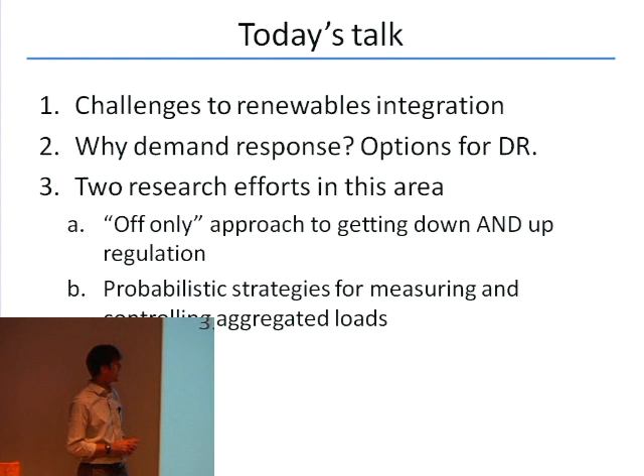So just to give you a bit of an overview of what I'll be talking about. I'm actually going to spend a fair bit of time just framing the issues and talking about some of the decisions that we need to make if we're going to proceed with demand response for supporting renewables integration. So those will be the first 2 sections of the talk. I'll talk about some of the challenges to renewables integration and why we might want to pursue demand response to address those. And then I'm definitely going to talk about this first research effort that is supported by CIEE and i4energy, what I'm calling an off-only approach to getting down and up regulation.

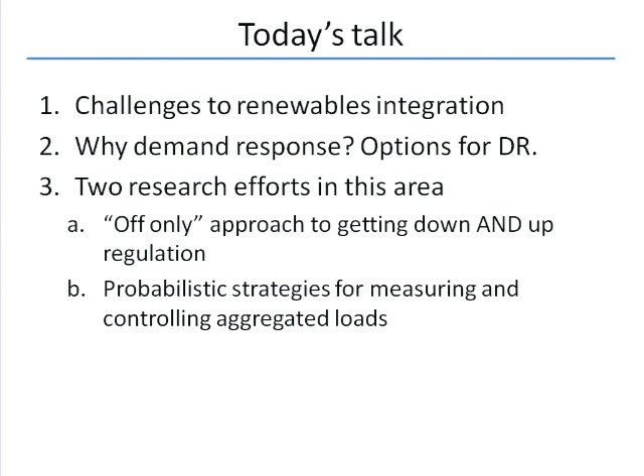So the idea is that we're going to try to switch loads off and use the natural dynamics of the system to try to get loads to actually increase their consumption at certain times as a result of letting them return to the grid. If there's time, I'm going to talk about this second project, probabilistic strategies for measuring and controlling aggregated loads.

Okay, so first let's just go through some of these issues about challenges to renewables integration. I've got 2 or 3 slides that I've pulled from other industry studies and reports that I think really capture what the dominant issues are.

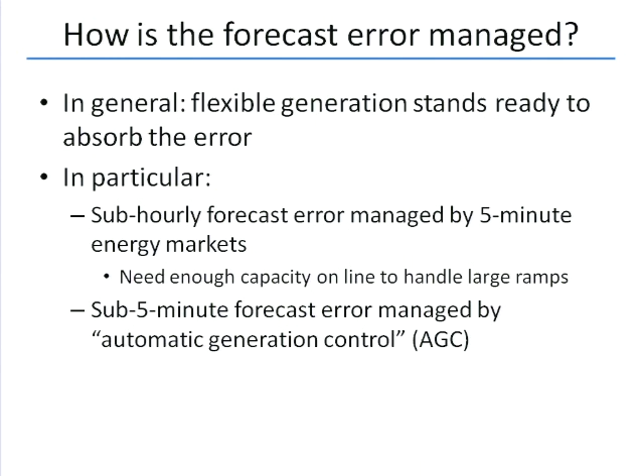The service is often called regulation, but this is basically like, you're no longer operating an energy market. You're just giving a system operator a dial where the system operator can just turn generation up and down as they need to. And so in this case, they procure a certain amount of capacity that is just sort of standing ready and available to do what they need.

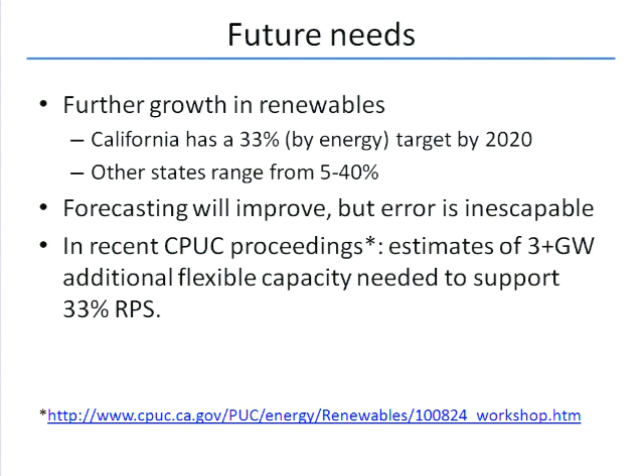So thinking toward the future, California is really, I think, kind of a hotbed of massive projected growth in renewables. So we've got a 33% renewable portfolio standard target by 2020. And that would be 33% by energy, not by capacity. And there's a big difference when you think about the fact that wind and solar produce energy only for a fraction of the time that they're actually connected to the grid.

Other states range from 5 to 40%. 40% is the state of Maine, and they're going to be operating in the ISO New England. So it's really the ISO New England's problem, and their total share wouldn't be 40%.

So forecasting is certainly going to improve, but the error is inescapable. And if we think about what's happened, Pacific Gas and Electric and the California ISO have been trying to address what they think they're going to need for balancing resources on the grid in 2020 if we meet this target of 33%. And they're saying that, in addition to everything we're going to build to meet load growth and everything that we're going to build to try to meet these renewable portfolio standards, we need 3 or more gigawatts of additional capacity on the grid just available to balance these forecast errors.

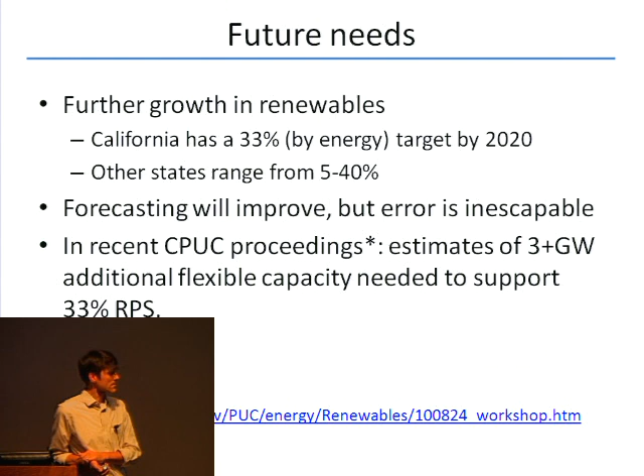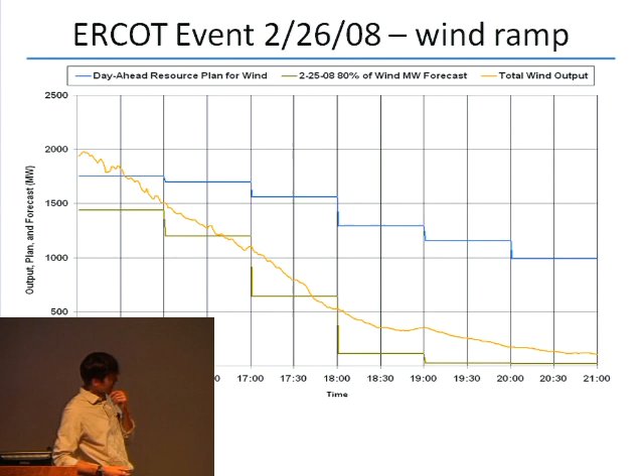So that's a really significant investment. And at this point, our best option is to look toward sort of fast ramping combustion turbines to do that job. So that sort of leads us to the question why and also how can demand response contribute to this challenge. So again, I'm going to start with an example of what happens in practice.

So this is an event that some of you may have heard about. It was publicized pretty widely. In ERCOT, about 2.5 years ago, they had a forecasted wind to go according to this blue line over the span of about 6 hours. And what they actually got out was this yellow line here. So you can see that by the end of this period, they were looking at a deficit of about 1 gigawatt from what they had expected versus what they actually got out.

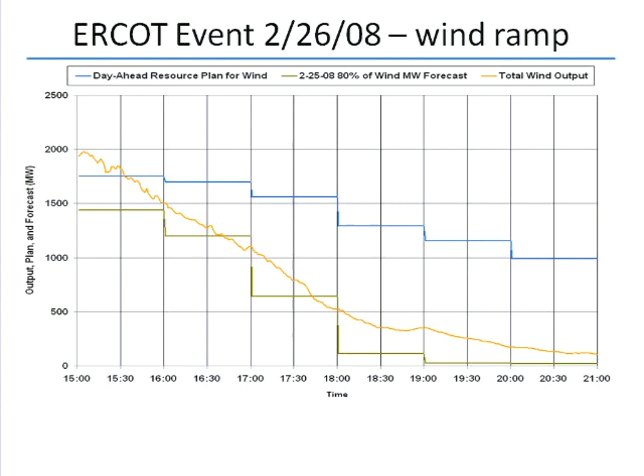So what happened? They saw frequency decline to 59.85 hertz, which is a really significant deviation in large-scale power systems. So in addition to bringing other generation online, what ERCOT did was they called 1.2 gigawatts of load that they had available to curtail. They had established contracts with this load ahead of time. The way that they called them was literally calling them on the telephone. They used the phrase verbal dispatch instruction, or VDI, which makes it sound really fancy and special, but they're literally picking up the phone.

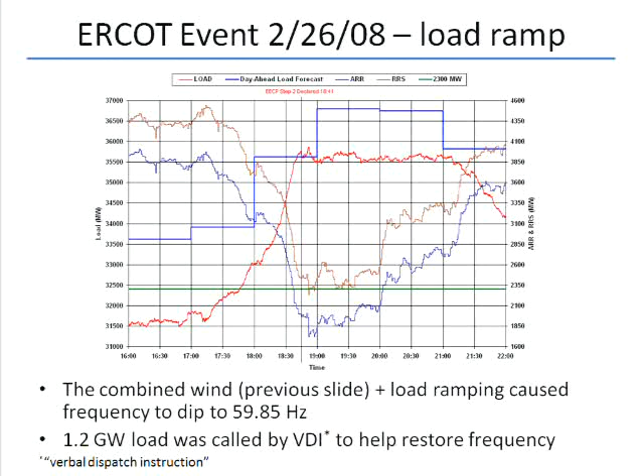But still, even though they were using this pretty crude technology, frequency was brought back in line in a matter of minutes. So this demand response event, even though we were using pretty crude approaches, had a really significant contribution to the performance of the system. Okay, so let's then think broadly. I'm going to spend the next few slides trying to frame in broad terms what I think the benefits are to demand response and some of the challenges that we face to implementing it specifically for the purpose of renewables integration.

So I think that arguably one of the biggest benefits is that there's a potential for a very fast response, essentially emissions free, because we're not moving generation around, we're not having to build additional generation. We're taking things that are already connected to the grid and serving some other purpose: refrigeration, water heating, space conditioning. We have these loads on the grid for some other reason than to provide a service to the system. But if we can bring them together to provide a service to the power system in addition to the service that they provide locally, then we've basically got two value streams. And ostensibly, you don't have to pay as much for either one. They can sort of cover each other.

So the second big potential benefit to demand response is that you may not have to pay as much to get the service as you would if you were just building new generation, because we've already got loads on the grid and we just have to figure out how to coordinate them. Okay, but then you might think, well, you're going to start moving loads around and, as a result, ask people to be uncomfortable or for their hot water to be cooler than they want it to be. But the beautiful thing is that in the US, about 50% of our electricity demand comprises loads that are thermal, and their ultimate service is to provide cool or heat. And the beauty of these loads is that we basically charge them.

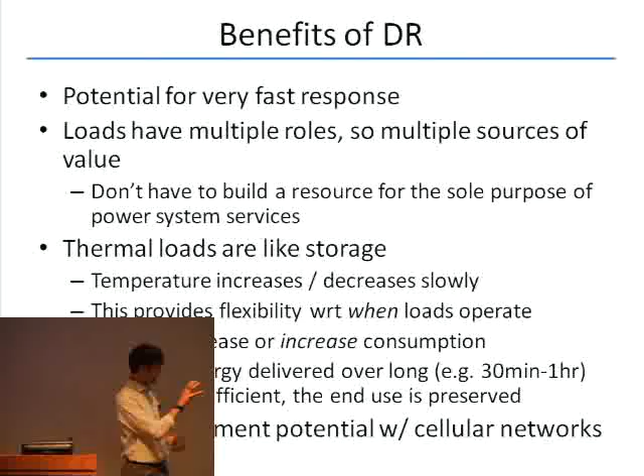So let's see, what other points do I want to make? Yeah, depending on what kind of thermal capacitance, what we ultimately want is an amount of energy delivered over a time period. We don't care exactly how much power we're consuming at one instant in time. So provided that we deliver that energy over the right time scale, you're not compromising the end-use function of these loads.

Then the other thing that I put in here just at the end that I think is interesting to consider is that, I'll talk about this a little bit more in a second, ultimately we need to communicate with loads. We need to tell them, provide a service to the grid, and to do that, we need some sort of a communications network. And cellular networks are as good as anything else, or maybe not as good as a fast broadband network, but we can get a lot of the information that we need over cellular networks, and these are globally available. So if you think about countries where energy infrastructure is relatively undeveloped, we could still try to deploy these kinds of strategies there to support variable production and uncertain production from renewables.

Okay, so then on this slide, I'm just going to go through. These are questions that I'm not addressing today in entirety. I'm going to address maybe some of these questions, but I think that these are big picture questions that we need to worry about when we're thinking about demand response and renewables integration.

So the first question is something that a number of people at Lawrence Berkeley Lab and at UC Berkeley are addressing, and that's what kind of infrastructure do we need? So we've got the thing that interfaces with the grid. We've got the load. But we don't necessarily have the thing that communicates to the load. And we also don't necessarily have the thing that after receiving that communication signal actually causes the load to do something that you want it to. So we need communications and control infrastructure.

But I think that one of the disadvantages, especially for small loads, is that, you know, I know at least personally, I probably don't have the attention span to go figure out exactly what is my demand curve for power, especially when all that I want eventually is an energy service over a long period of time, rather than some instantaneous amount of power that the real-time price would reflect.

So from a sort of headache perspective, I think that if the incentive is right, if the value of that option is right, then direct control can be better in certain situations.

And then other big picture questions: what kinds of loads should we target? One way of distinguishing them is that we could go for a few large loads. If we want a megawatt of capacity, we could try to get 10 100 kW loads, or we could go with 1,000 1 kW loads. So there are a lot of ways of thinking about what the trade-offs are here.

Certainly with large loads, you can imagine that this question has a different answer, because if you just have a few loads, you can spend a lot more on your communications and control infrastructure. If you have a lot of small loads, you don't have as much to spend on each one, assuming that ultimately the service that you're providing is the same.

And if you know the industry at all, this is sort of like the EnerNOC model, and this is the Comverge model. So these are two major demand response organizations. And at this point, I would say it's probably fair to say that this model is winning, the few large loads. But I think that there are a lot of benefits to the lots of small loads idea, and this is one of the reasons.

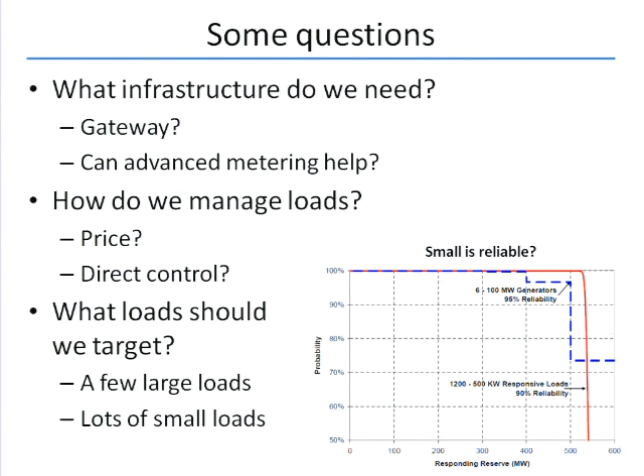So this is one thing to think about. There are a lot of other issues, I think, to consider when we're talking about large versus small.

And so I don't think that there's one silver bullet, but I will say today what I'm going to talk about with the research results is direct control of aggregated loads, and what I mean to imply by that is lots of small loads rather than a few large ones. And so I'll talk about trying to deal with communications constraints. It's more in the second project, which at this point I probably won't have time to get to, that I deal with this issue. And again, direct control of small loads.

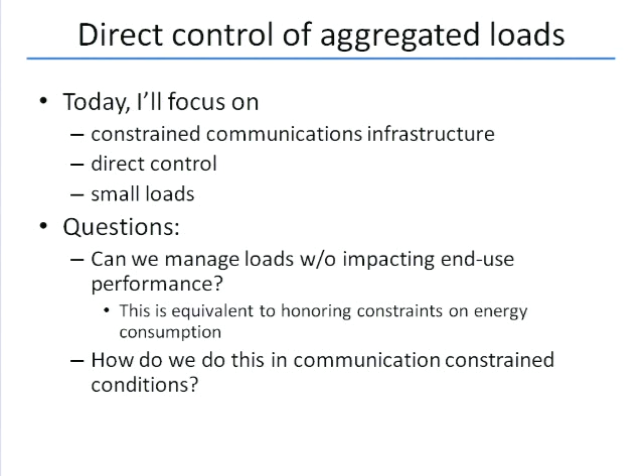And sort of the big picture guiding questions I think that we're trying to understand are how do we manage loads without impacting end-use performance? And I've talked about energy services over a period of time, so you can think of that question being rephrased if you were doing some sort of an optimal control problem. You've got a constraint on energy that you have to meet. And we're going to assume that if you meet that constraint, then you meet your end-use function objective. And then again, I've said this a few times, how do we do this in a communication constrained environment?

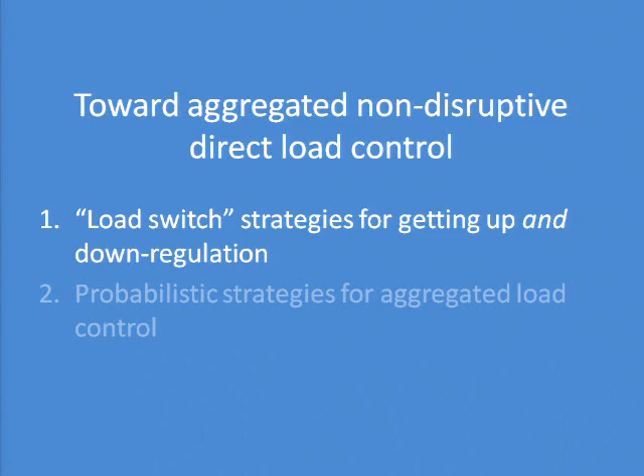Okay, so I'm going to talk about this first project, which I call load switch strategy for getting up and down regulation. Okay, so just for background, load switches are actually, maybe not widely, but they've been used for many decades actually for the purpose of peak demand reduction. The idea being that you interrupt the thermostat wire to an air conditioner, and you can basically cut the signal and turn an air conditioner off when peak demand is high.

I should also say that Joe Eto at the lab has done really innovative work looking at using these types of switches, or actually older, 30-plus-year-old switches, for spinning reserves. So basically doing what the ERCOT wind event did to try to get a bunch of demand off the grid very quickly, rather than just trying to do a long time-scale reduction in peak demand. But what we're asking in the research that I'll talk about today is, can we do even more than that? Can we do more than just curtail load over timescales that are of interest to renewables integration?

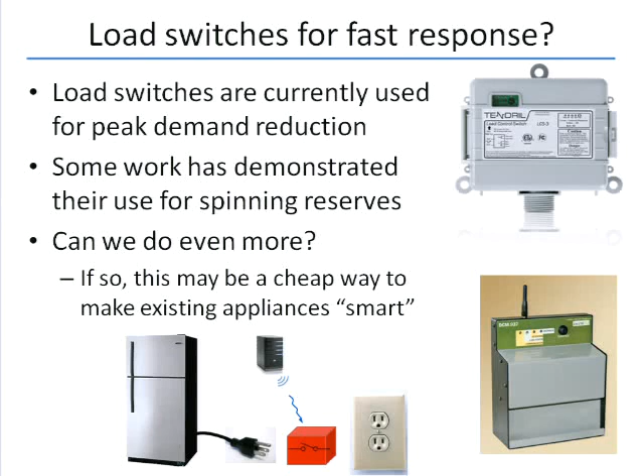So that's what I'm going to try to sketch out at a high level, how these things work in this project. So what I'm going to do is basically just kind of give you a feel for how the high-level control scheme works, which is just sort of a heuristic thing that we thought up one morning, and not go into really any detail on the models that we put underneath and the actual theoretical control strategies that we use.

So the basic idea then is that, as I've gotten at already, thermostatically controlled loads often operate in a discrete state. So typically just on or off. And we call the duty cycle, this is probably review for all of you, but the duty cycle is basically the fraction of the time that the thermostatically controlled device operates in the on state. So typically that's going to be on the order of something like 50%.

And then, so what we're doing now is we're going to define a control mode, which is that we switch a fraction, and I'm going to call this gamma. A fraction of the loads, we switch them off on every time step. So we're operating in discrete time on the control, and once a minute, let's say, we're going to switch off some fraction of the loads. We'll call that gamma.

And then we hold them off for a certain number of time steps, and that parameter in this model is m. So for example, with refrigeration, every minute we turn off, let's say, just 5% of the loads in the population, and we hold them off for 5 minutes. And with refrigeration, it's important to make sure that you don't release them too quickly, depending on what the local control in the refrigerator is, because you can do something called short cycling of the compressor.

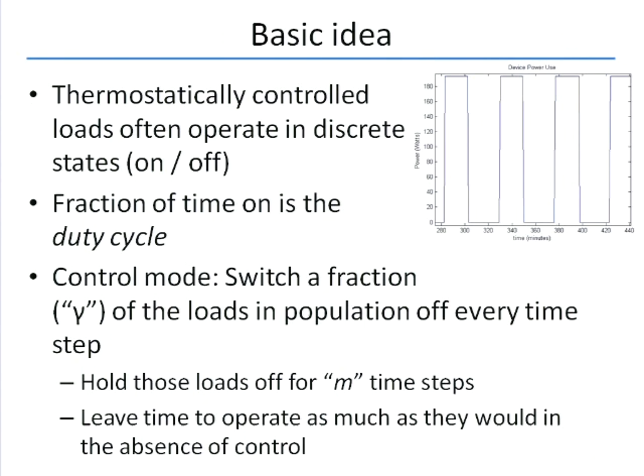So it might be that we're just going to operate the switch in the middle right here and turn the load off for 5 minutes, and that just means that it's going to operate a little bit longer later on. But we don't make that shutting off of the load so big that they can't maintain their set point anymore.

Okay, so as I said, now we have one single control input to the aggregate system. Switching off more than usual, intuitively, that transiently reduces demand. Switching off less, this is the interesting thing, transiently increases demand. And then provided that gamma is small on average, the average demand should be unchanged. So now we can go through and we can start thinking about, well, how do we model this system in aggregate? What kind of control strategies do we apply to gamma?

And that's detail that I'm not going to go into today. But we're looking at a bunch of different ways of doing it. PID works remarkably well. Minimum variance control, I'm going to show you some results for that in just a second. We're still working on getting the aggregate population model to work well enough for MPC.

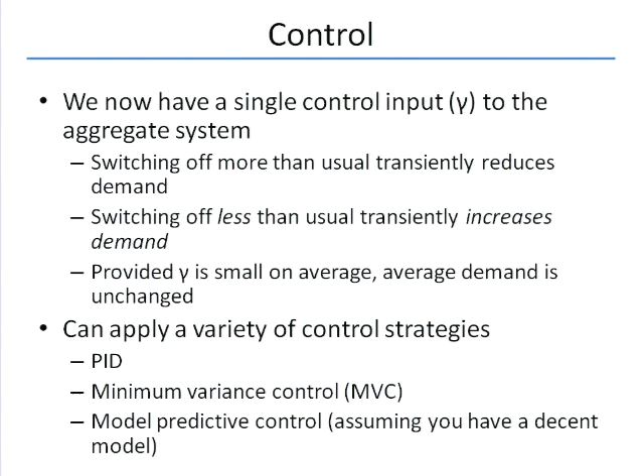But the reason that this is interesting is because if you have some trajectory of a signal you would like to follow, let's say you've got a 5-minute dispatch signal and you want to follow that, and you have some idea of what your population is going to do over that 5-minute interval, you can start thinking about doing a receding horizon control problem. And so I think that there's probably some benefit to be gained by doing this, provided we can get a good model of what's going on.

Okay, so before I go and show you some of the results, just to sort of motivate the kinds of loads that we're thinking about working with. So this is actually from about a 10-year-old study that Jonathan Koomey did up at Lawrence Berkeley Lab, where they looked at how much energy different end-use categories on the grid consume. And what we saw when we were looking through all of these different end uses was the things that really stood out for potential for this kind of control was commercial refrigeration, residential refrigeration, commercial hot water, and residential hot water.

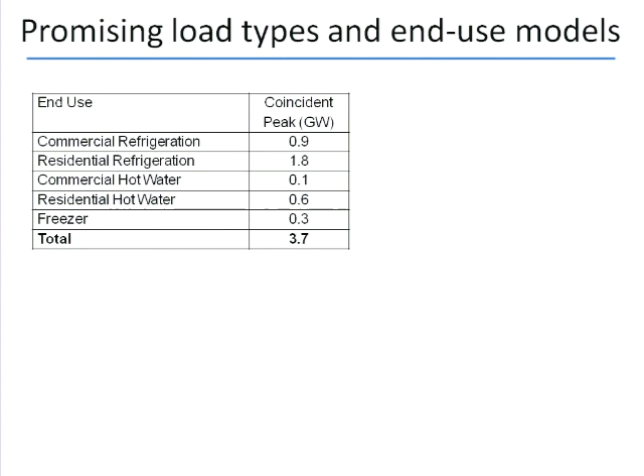So together, their coincident peak demand is, from this 10-year-old study, something on the order of what you might want to manage for renewables forecast error. Of course, we don't know if we can tap into all of this. But if we could, then it's simply problem solved. So I'm sure it's not that simple, but it at least says that these are exciting loads to be looking at applying this kind of a strategy to.

And then the other thing that we've spent a fair bit of time on, especially Taylor Keep and Froy Cifuentes have done some really great work here in terms of developing very detailed end-use models of refrigeration and water heating. So multiple state models, rather than just thinking about what's the bulk temperature in a refrigerator, it's important to consider the distribution of temperatures in the refrigerator.

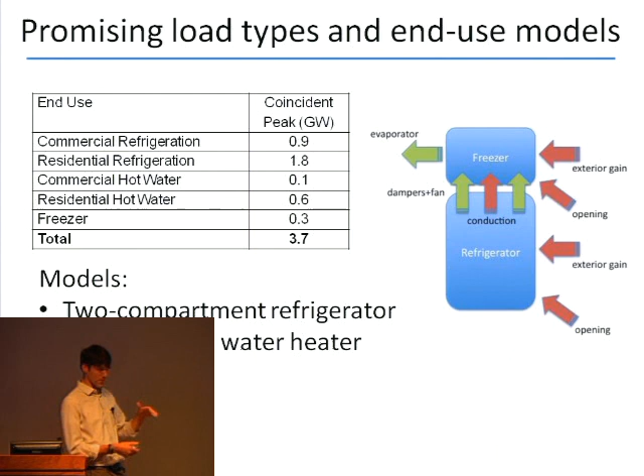In the case of a tank water heater, we've actually got a stratified tank water storage model, because ultimately, it's easy to imagine with a water heater, all you care about is what's the temperature at the top where you're pulling hot water out. So it could be that the temperature gradient could be really steep, but you don't care because you're still getting hot water out. So of course, as you draw water, if it gets cold, then that's a sort of failure of the end use, the way that we categorize things.

But anyway, suffice it to say that it's been really important for us to get these details right in order to actually evaluate how effective the control is. And that's basically what I'm saying here.

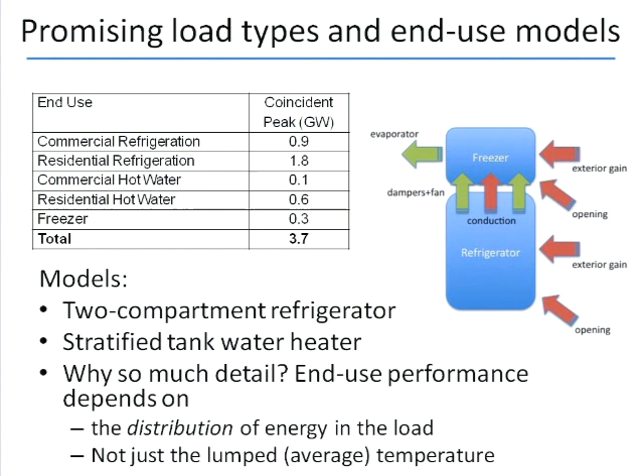Okay, so then we put together a simple target trajectory where the idea is that we had some sort of baseline, what we thought demand would be in the model over some period of time. And then, because we're assuming this is forecast error, we're just going to say this is some normally distributed random noise around the baseline. So we basically just add, every 5 minutes, a different random number to that baseline.

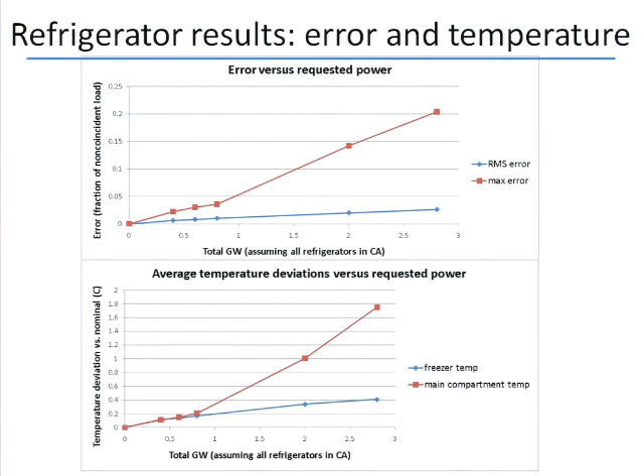So what we're looking at here is the temperature deviation from what it would have been doing in the absence of the control. And you can see that we're looking at, on the order of a degree Celsius, how much we might be moving, in this case, the refrigerator freezer compartment away from where it would be in the absence of control. So maybe that's acceptable, maybe it's not. We're not really sure, but we know that our objective eventually is to try to get that as small as we can.

And then another way, just thinking about what this means in terms of cost. So now we're looking on the y-axis at the annual value per device. This is actually not as strong a result as we were hoping for. But again, looking at the same x-axis, gigawatts of amplitude, and then assuming certain values, in this case we're saying if this is regulation or automatic generation control, in the California Independent System Operator, they'll pay on the order of these amounts for getting that service. And so if we were providing that service using this approach, this would be the annual value of one refrigerator to the system.

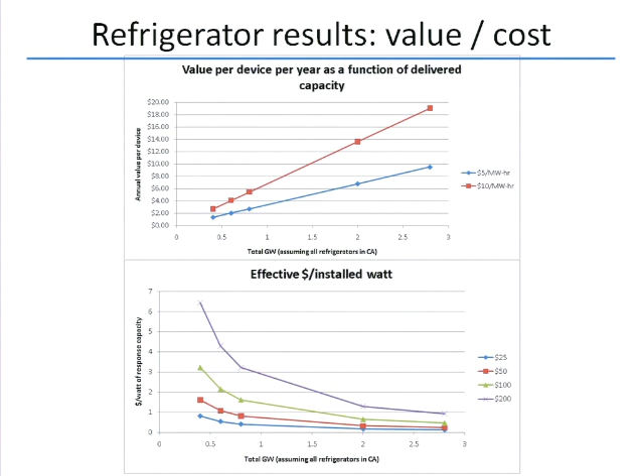So it's kind of a small number and probably not enough to support the installation of one of these load switches on its own. But if you look at things here, now we've got dollars per watt of responsive capacity. So this starts to get a little bit more interesting because, okay, let's assume, taking this red line, that it costs us $50 to install the load switch and to manage the program. Then this curve is telling us basically how much it costs us to get that watt of capacity in a dollar per watt metric.

And so what you can see now is that for these values for the load switch, 50 to 25 bucks, you start getting stuff that's competitive with conventional generation. So that's sort of interesting. Big caveats here that we're still working on refining the control. Maybe we can't actually get this much capacity. Maybe we can get even more.

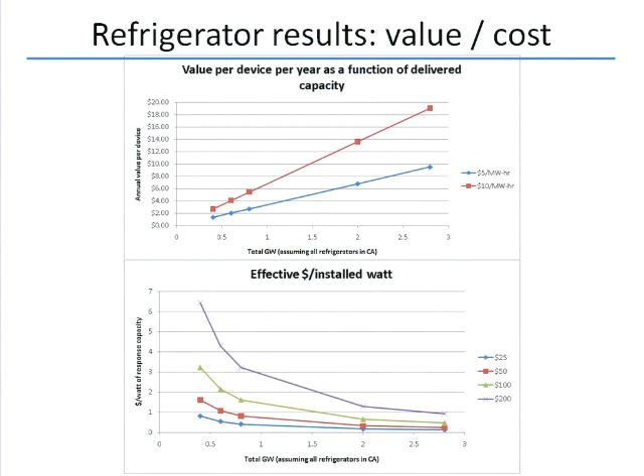It's still sort of open to improving our results. So, okay, open questions and objectives and challenges. So we've got, as I said, work to do in terms of improving the performance of the controller. I think it'd be really interesting to think more about how we actually integrate this kind of a program into energy and ancillary services markets.

It would be very interesting to understand the system-level impact. So if we're replacing generation with demand response, what's the impact on emissions? We need to know more about what the impact of cycling these loads has on the actual long-term maintenance.

And then this is, I think, a big issue. When we're talking about little loads that we're monitoring or controlling and we don't have a lot to spend on communications infrastructure, how do you actually convince the California ISO that this is something that they should have paid for? How do you convince them that you provided a service that's useful to them? I think ultimately it's got to be some sort of large statistical sampling approach where you trust that it's happening, but you do some sort of random sampling to verify that you're actually getting what you want. So with that, I'll close and take questions.

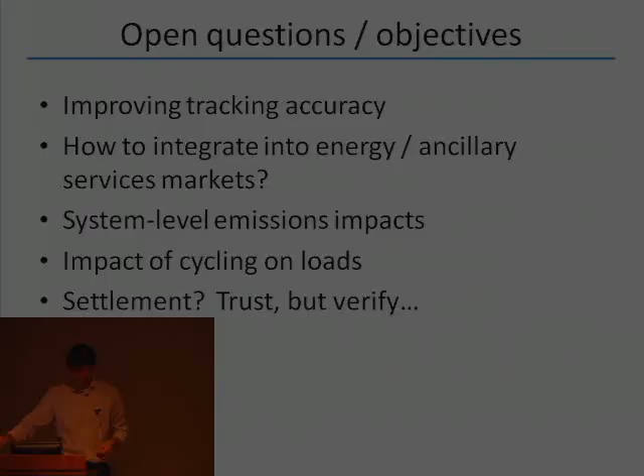Yeah, I've got a question. I'm back here. Wouldn't it be a lot simpler to just do what Whirlpool said to me 5 years ago at their global headquarters, that if they replaced every refrigerator in California, they could save enough power to power up the rest of the country? Maybe that's changed to maybe half the country. My question is, how are the refrigeration people going to approach this? It could invalidate their warranties and the life of the operation of the units. And you don't have any industry data; how come you haven't talked to Whirlpool in Evansville, Indiana, or GE in Louisville Appliance Park on some of this?

Right. So we've actually initiated some conversations with GE. It's tough to get their attention, unfortunately, as you might imagine. But we're not leaving this open. I think it's a really important question that we need to look at more. The primary concern, as I understand things, is that we don't want to short cycle these compressors if we're talking about refrigeration. So there are local controls in place to prevent that from happening, but we can also structure the time that we keep these things off to prevent that.

Also, if you think about other types of end uses, like water heating, there's basically nothing that you can do to break that thing in terms of the approach that we're taking. So maybe that indicates that ultimately we want to focus on water heating rather than refrigeration, which is why we're looking at both.